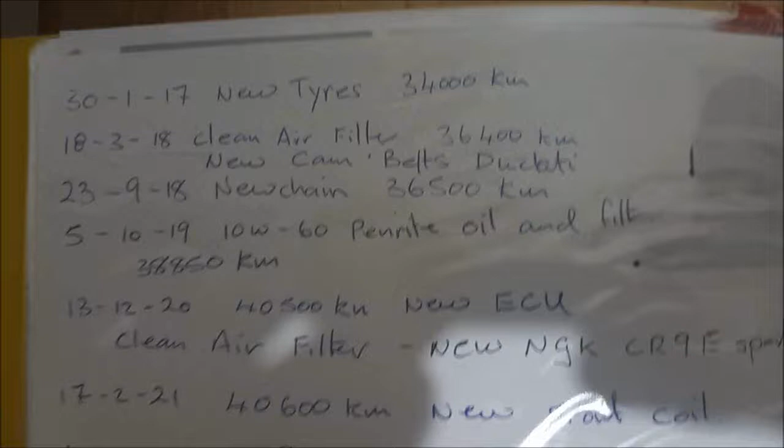Okay, 2018, 36,400 Ks is when we did the new cam belts.

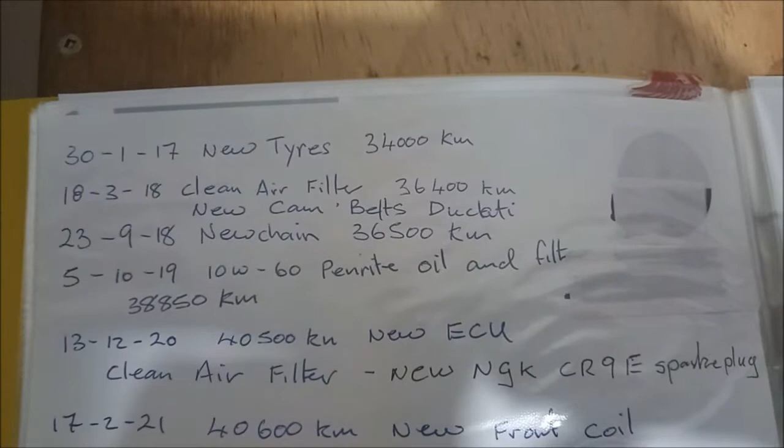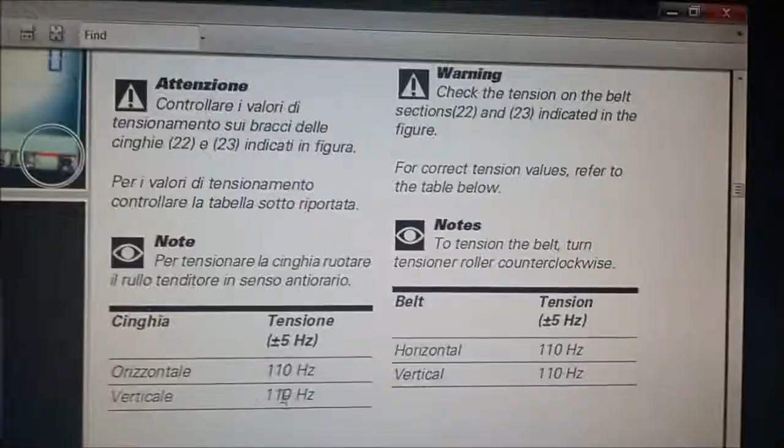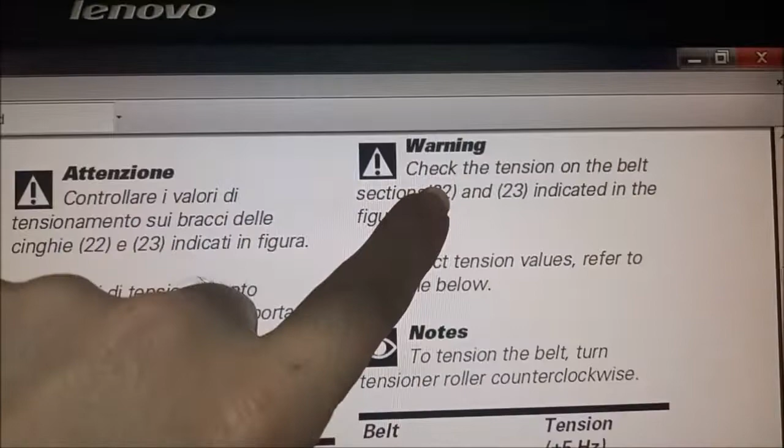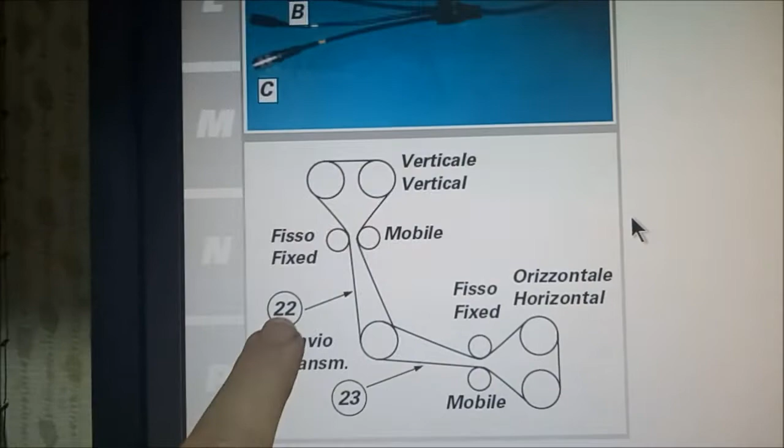Okay, so in the Ducati technician's manual, this is the tool that they use for checking the frequency of the belt. And you are looking for 110 Hertz plus or minus 5 Hertz, right? And then check the tension, the belt at section 22 and 23 indicated in the figure. And that's here. So it's saying 23 in the middle of this section and 22 the rear vertical.

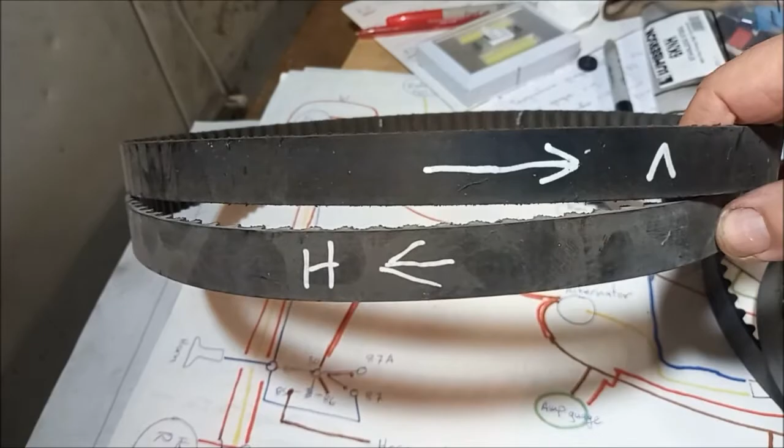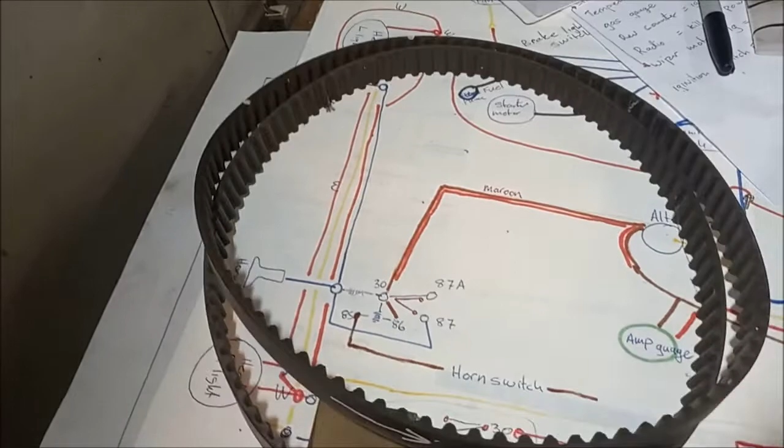So these are the original Ducati ones that the bike came with. These had actually done 22,000 Ks and about 12 years old. And then these are the second pair that I put on, which are the California Cycle Works ones. And I did about 14,000 Ks with these ones. And now the third set are the ones on the bike, which are genuine Ducati Gates ones made in the UK.

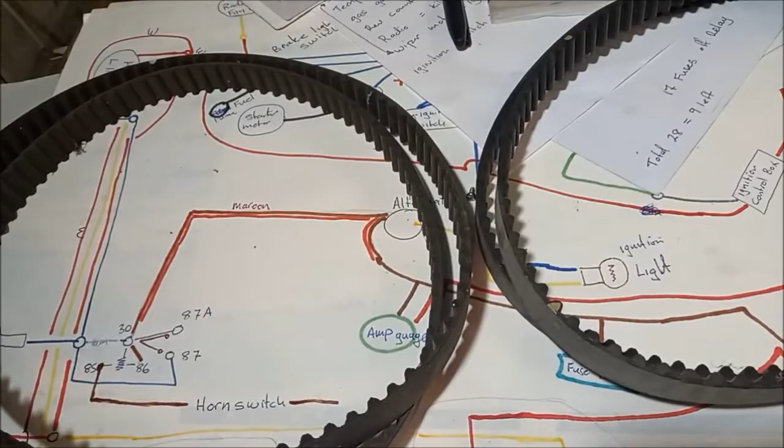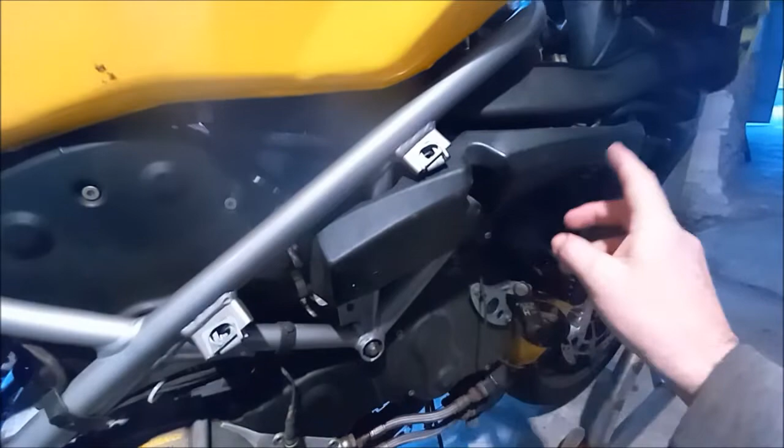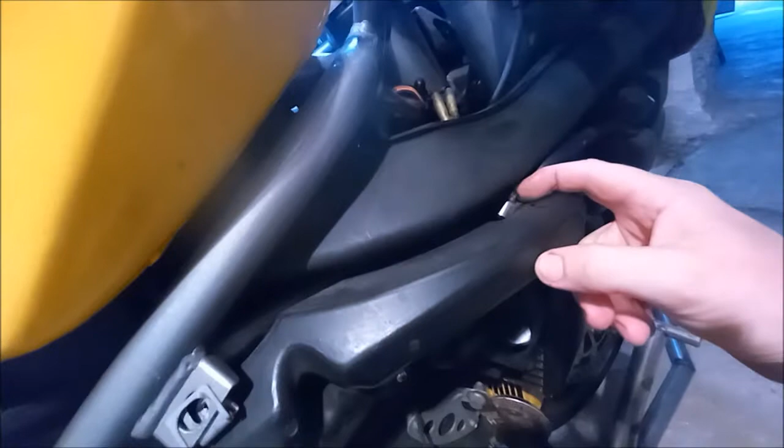Alright, so we're going to do a check on the cam belts. So we need to remove these covers. So to do that, we need to get the oil vapor, crankshaft vapor tank out of the way, which you'll just have one screw here, and then you've got the hose clamp up here, so you just pop the hose off there. Don't bother removing the hose from the airbox.

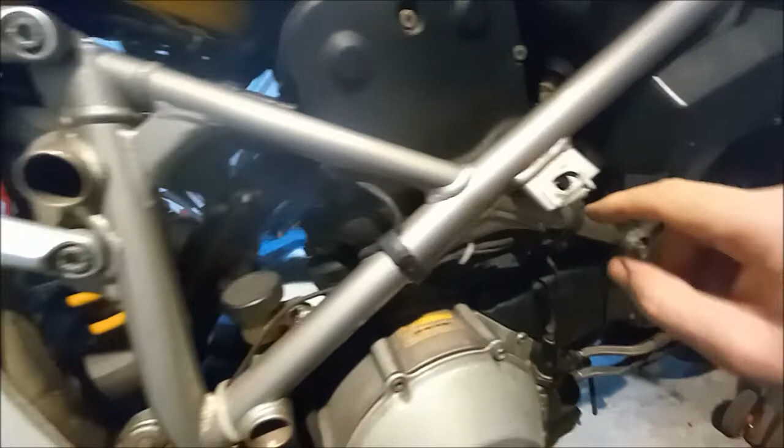Then this hose here, you can leave this hose clamp here, runs down to here where it sucks out of the crankshaft, crank housing, and then you can just undo that clamp, lift that off that, and you can slide it through. To get this cam cover off, you need to loosen up the fuel tank so you can get it up out of the way. Pretty sure it's a bit easier like that.

So to get the cam covers off, we've just got some bolts here, undo the horn, and then the same in here. There's a couple hiding in around here, and then one here. So they're just Allen keys, metric.

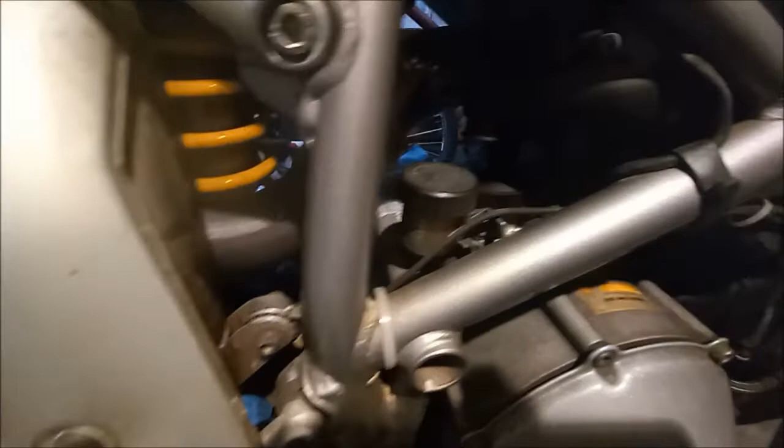So with this hose here, just take the clamp right off, because you need to be able to squash it when you slide it through the frame here. And this one you can just leave here like so, unless it just falls off like that. But you don't need to take it out, you can just slide it off the tank.

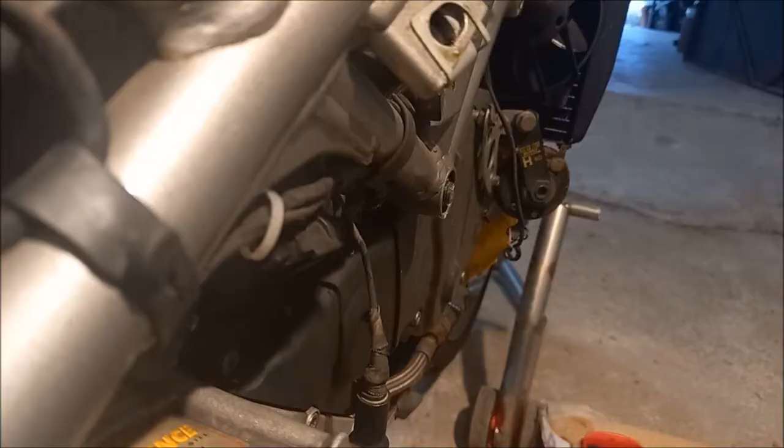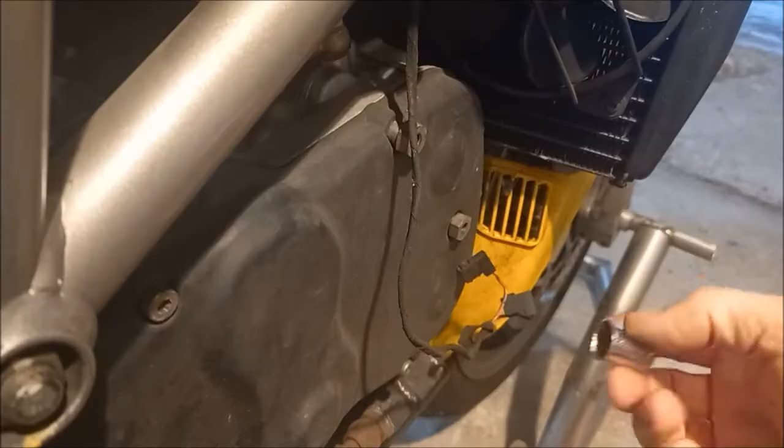So under the horn, it then turns into two 13mm socket for the bolts. Right, so front cover just comes off easy, then the middle cover here. So you can see the print starting to wear off a bit. These are genuine Ducatis, which are made in England by Gates belts.

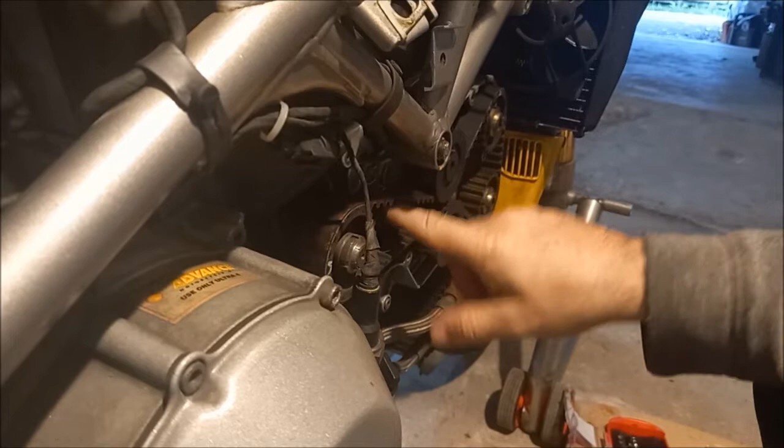So they shouldn't be super tight. You should be able to just move it around 3 to 4 mil. You should be able to spin your cam adjusters, your tensioners. Should feel a bit firmer up this end. But I've never ever used a tensioning tool on these. All I've ever done is measure this gap here between the two pulleys, set it the same, and if it just feels just 3 to 4 mil of movement there, it's normally right.

Okay, so I've got the bolts out on this one. And yeah, doesn't want to come out. There you go. It's a bit tight. It'll be a lot easier with the tank loose. It's this little hump here is a bit of a problem.

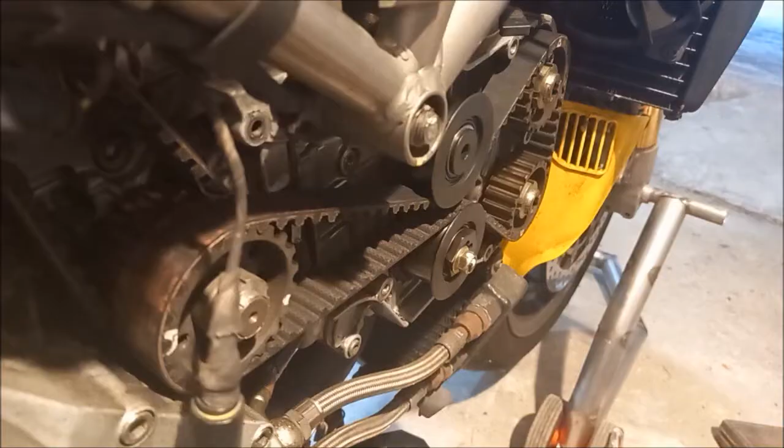So before I make any changes, I'm going to measure this gap between the adjuster and the fixed one. And it's 8.2. So just using an 8mm drill. That fits in, not a problem. 8.5 doesn't fit. And 8.5 doesn't fit on the back cylinder.

So I've got the 8mm drill and a 0.25mm feeler gauge. So that just pops through there nicely. So that's definitely about an 8.2. And then same on the back one. So I have an app on the phone that measures the frequency, because normally you do a flick on the belt and you measure the frequency, and I think it's 110 hertz plus or minus 5.

Okay, so we've got the back plug out, got the front plug in, so I know when we're on the compression stroke. This mark here should line up with this notch. So I'll put it in gear and then we'll turn the engine with the back wheel in the right direction of rotation that way. Right, so I've got both plugs out.

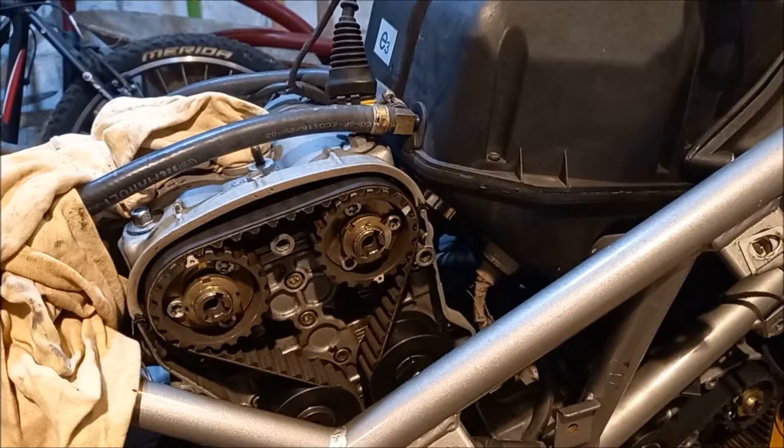Okay, easy way to tell if you're at top dead center. You've got the plug out, put a rag in the back cylinder, and then you'll hear the front cylinder hiss. And then when you go past the timing mark and the back cylinder hits, you'll see the rag pop out. So we'll turn it. That's the front cylinder, and then that's the back cylinder.

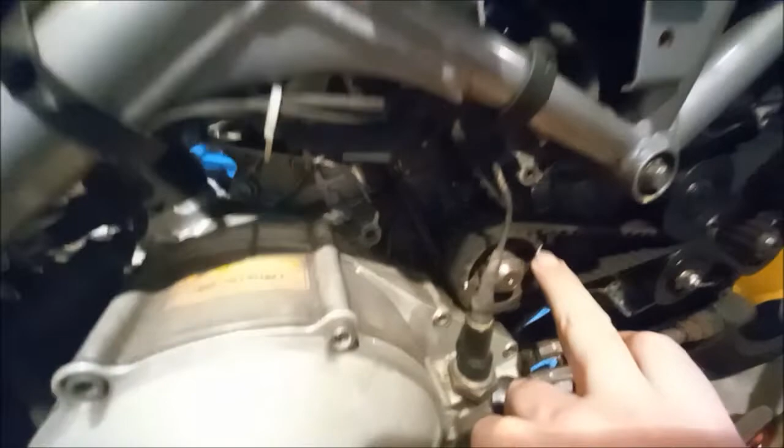Okay, so on top dead center, that marks there, and these two marks are slightly offset. So the back cylinder is in position. So the dot timing mark is over here now, and the cam timing marks are here and here. Seems a bit strange that they're offset like that.

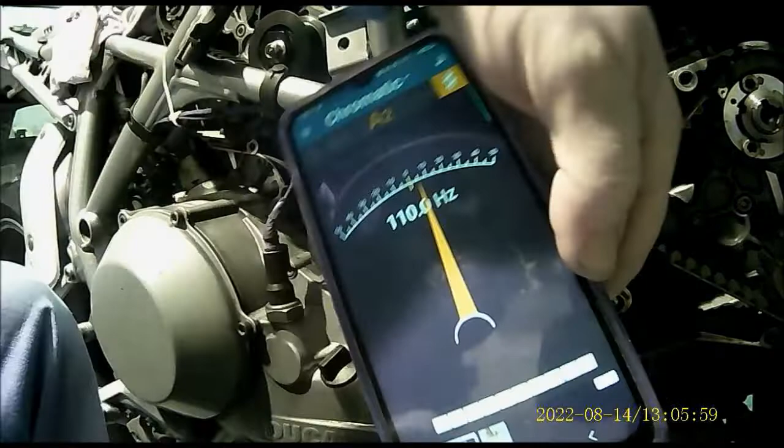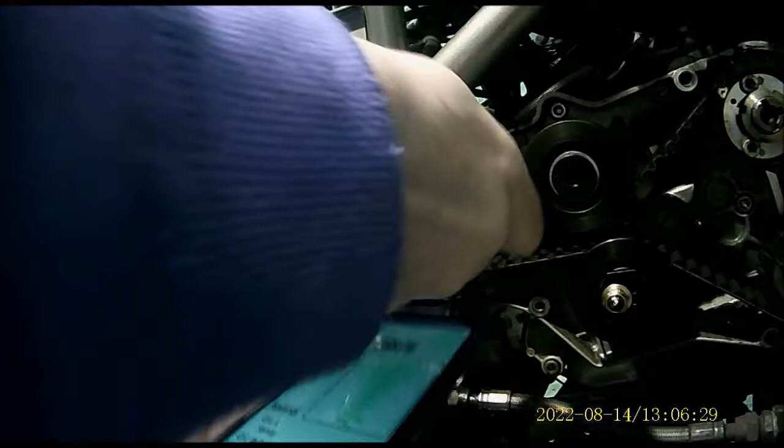So perfect 110. 110, 110, 109. So let's wiggle the cam back and forward. 106, 106.

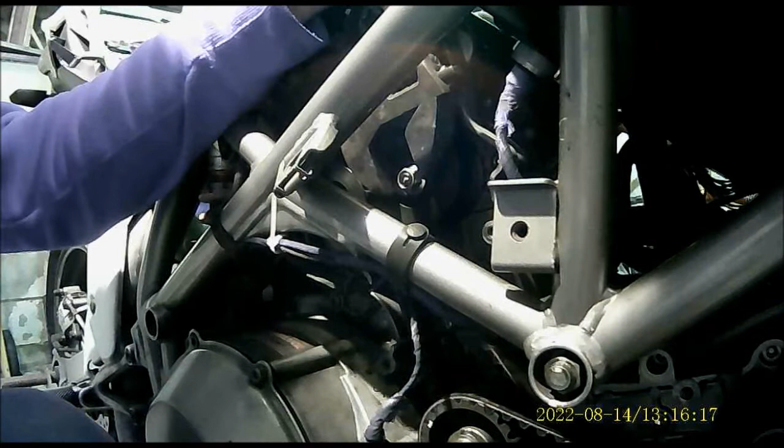So I've just loosened the lock nut off, and then it's only that much of adjustment on the actual cam, and then lock it up. It still feels pretty loose. Move quite a bit. Yep.

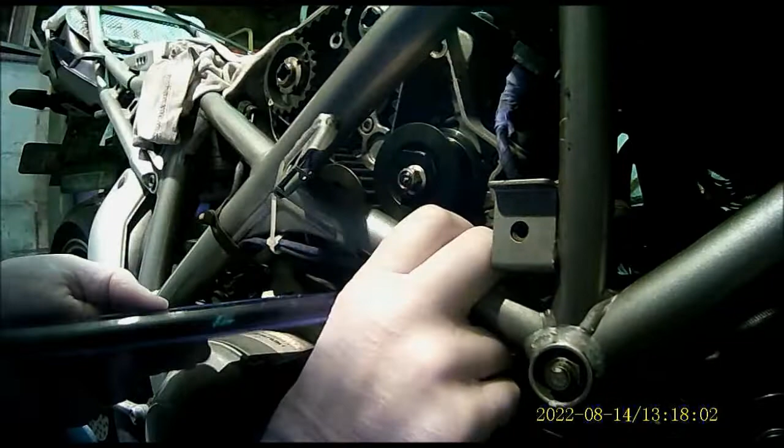Drill doesn't want to fit through now. It doesn't want to fit. Back that off a little bit. Yeah, it's just catching a little bit as it goes through. Now we'll lock the cam up. So that's showing too tight now. A little wiggle back and forward. So too tight.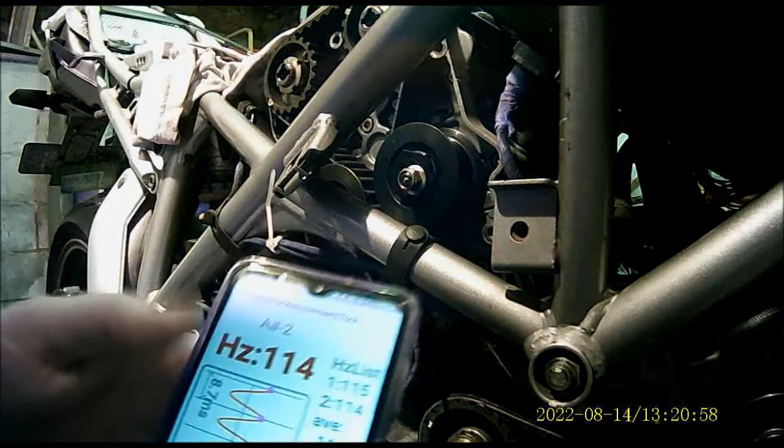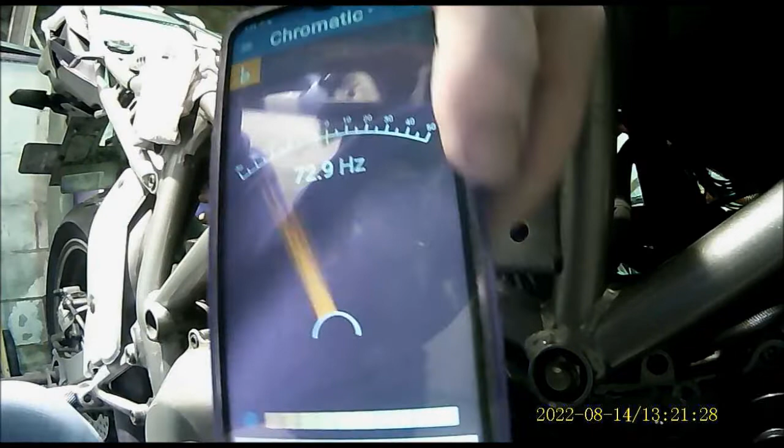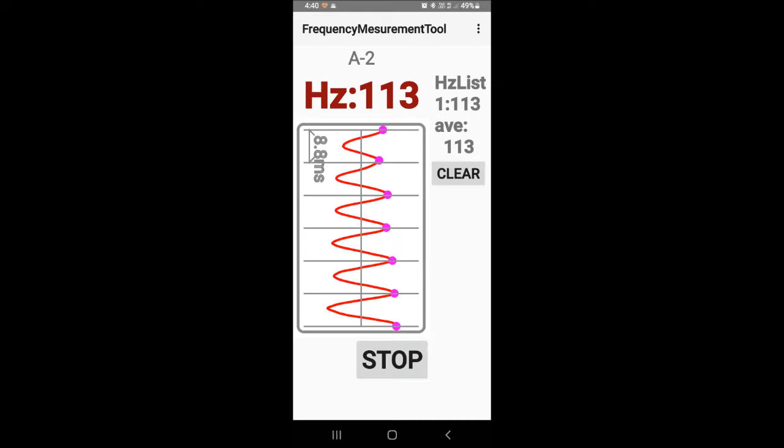So the drill's fitting through easy now. We'll lock this up. Get it to wiggle back and forward. Drill's fitting through without any problems. 115. So that's our max that we want. 114. This one you have to hold quite close to the belt to get a reading. 116. 115.9. So that's right on the max limit that you want.